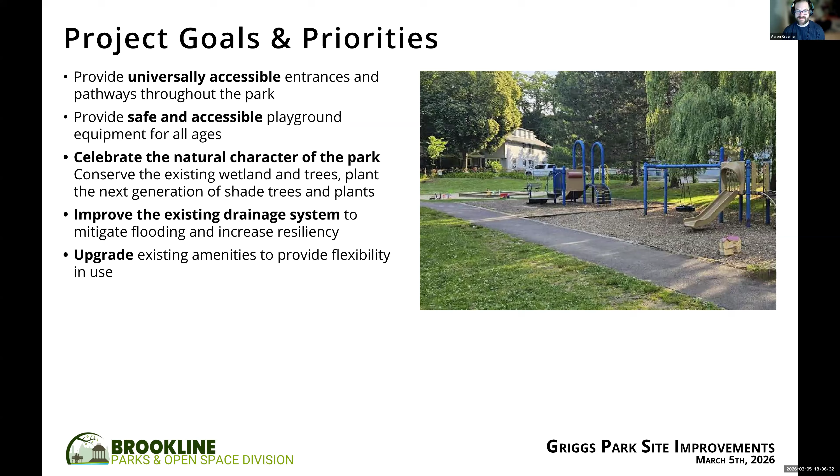These are just background goals and priorities. Our goals for this project were to provide universally accessible entrances and pathways throughout the park, provide safe and accessible playground equipment for all ages, celebrate the natural character of the park including conserving the existing wetland trees and planting the next generation of shade trees, and improve the existing drainage system to mitigate flooding and increase resiliency, and upgrade existing amenities to provide flexibility in use.

We are at meeting 6, March 5th. If design is approved tonight, we'd be looking to go to Park and Rec next week, Aaron. Next week. So if you approve it today, it will go to Park and Rec next week, which hopefully gets an approval there. And then we'll dive right into construction drawings, which will take the rest of the summer to produce. The idea is that we'd be bidding this either late this year or very early next year, for construction to start early spring next year as soon as the ground thaws.

These are some of the previous votes. In meeting 3, it was voted to have a 6-foot wide loop path while maintaining the existing wider path at the main entrance on Griggs Road. It was also voted to have no additional wetland interactions, no paths or anything through the wetland. The committee voted to see if we could keep the secondary entrance at Griggs Road the same. In meeting 4, the committee voted on Kompan to be the play equipment vendor, voted for 2 additional picnic tables for a total of 3, voted to keep the playground layout similar to existing with an added buffer between the path and the play equipment, and voted to have no adult fitness activities such as basketball or outdoor athletic areas added to the park.

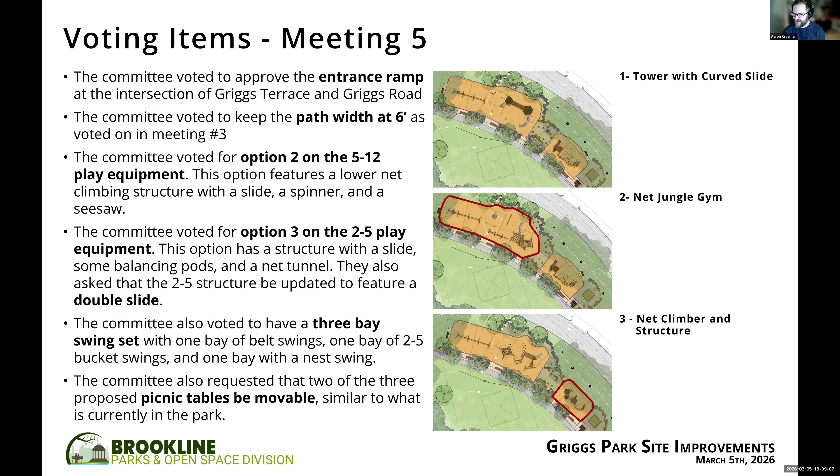I'm just going to go through this. If anybody wants it, we can come back to it.

Okay, final concept plan. First we're going to talk about pathways, then spend most of the time on play equipment, then natural landscape and drainage.

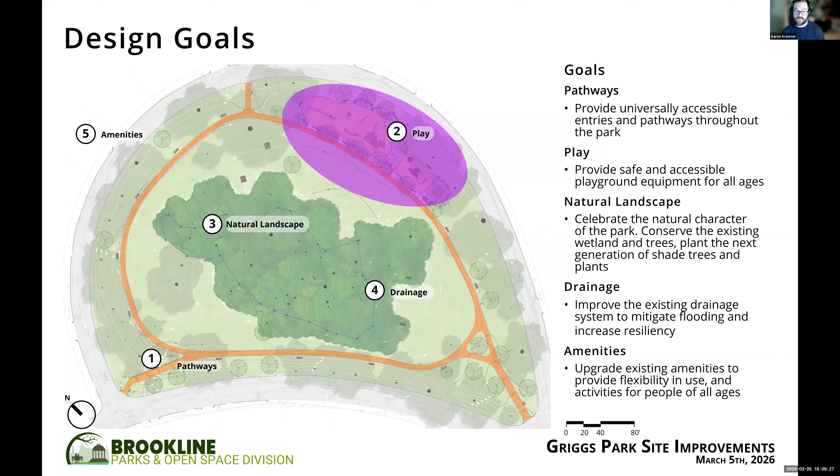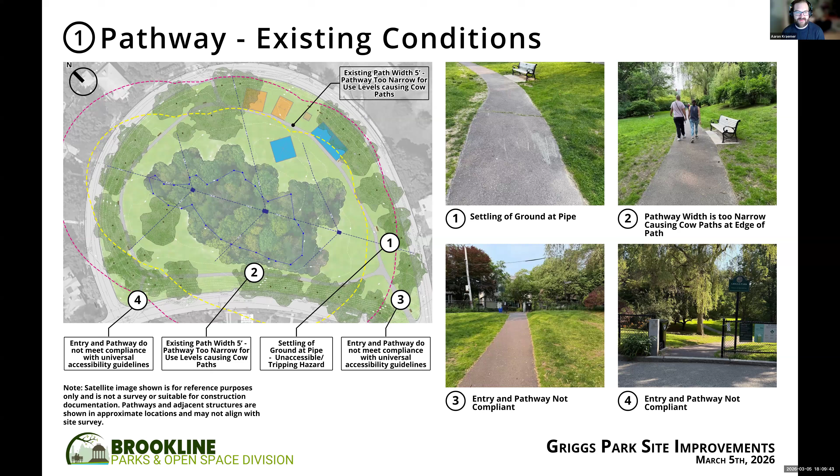Pathway goals were to provide universal accessibility. This is the current conditions - 2 of the entrances are not accessible, and there's some settling, especially at that drainage pipe. This is the same ramp as last time that was voted and approved.

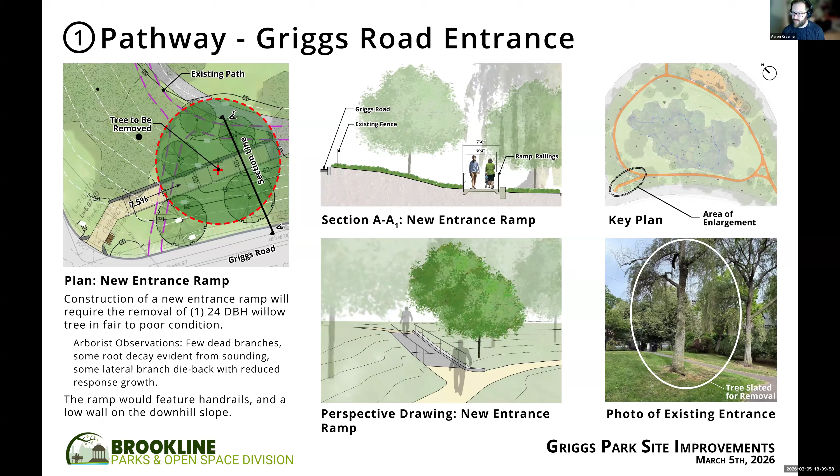So the one tree, a 24 DBH willow in fair to poor condition, we're going to have removed to construct a new ramp that will be 7 feet wide, giving you 6'3" between the railings.

So here's an overview of the revised play equipment. From the last meeting, the net structure from concept 2 is maintained. It includes a taller slide and several overhead play elements. We did remove the 2 spinning overhead elements and replaced them with monkey bars.

The 5 to 12 area also includes an inclusive net spinner and a seesaw. And in the 2 to 5 area, we have a double-slided structure linked to a tunnel with some log steppers, and there's also an added playhouse.

The one thing I will report back on, since this was something looked at - comparing the existing and proposed footprints of play equipment for the safety surfacing based on the options chosen, we were able to get the footprint down from about 5,500 square feet last meeting to about 5,000 square feet, which is only 500 feet more than what's currently at the park.

So here's an overview of the play equipment. On the left is the 5 to 12 area showing that slide, the 3-bay swing set, and the net climbing structure with the spinner. On the right is the 2 to 5 area showing the playhouse and the smaller structure with the double slide, the balancing elements, and the net climber.

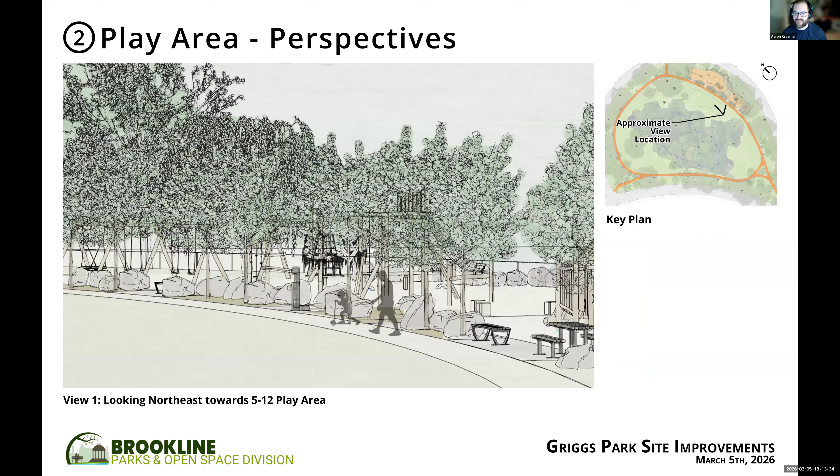And then kind of that natural area connecting the play areas. With that, I'm going to go back to the main slide and ask if anybody has any questions on the play equipment.

And if you have a preferred color for the swings. Aaron, will you just point out where the sandbox is, just so people are aware? Right by the 2 to 5 area, we are going to be putting the sandbox in. It's the same size as the existing sandbox. We'll do some boulders and logs around it. We'll also use the stabilized stone dust surfacing around it because that is an accessible surface and it's okay if sand gets tracked into that. Like now how it's hard to get lawn to grow there, we won't have the issue with the lawn in the mud.

Any other questions? There's a hand raised by Michelle Rosen. Do you want to take from the committee and the general audience, or Aaron and Millie, what do you think? Looks like Carol also has her hand raised first. So Carol, you want to go ahead?

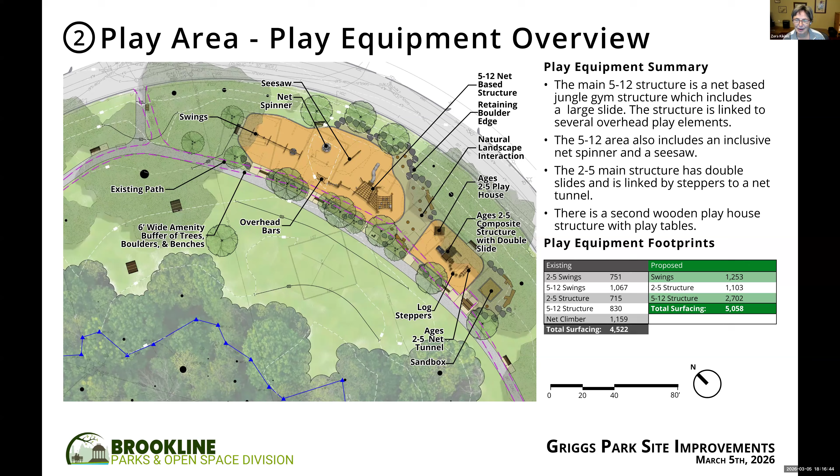Thanks. Zora has her hand up. You're muted, Zora. Thank you. So I do like it very much. Thank you for designing this so nicely for us. I liked it very much in the playground for the ages 2 to 5. You have two houses. One of the houses has kind of a nice roof, a bent roof. I don't know how I should describe it — a curved roof, yes, thank you. I really like that very much. I was actually wondering if the other house could have something similar, maybe a similar curve, symmetrical to this one.

That would be something I would have to ask the manufacturer. So that would be something I can't give you a definitive answer right now, but I could definitely, if you would like me to look, reach out to the company and see if they can mimic the two. So I like it very much, the curved one. It's really cute. Any other comments, Zora? Is that good? That's it. Okay, thanks. Stephanie has her hand up.

Thanks, yeah, I think this looks really great. And I just wanted to say thank you for the path. I know you mentioned last time that it might have to kink due to locating the swings where they are, so I was really happy to see that you're able to figure out not to kink the path. So appreciate that. I don't really have any further comments.

Oh, actually, I did want to ask about the slide — I know Aaron had kind of asked if that was possible to be a tunnel slide. I completely forgot. Oh, no worries, I can ask them. Same with the little roof. I can see if they can do a tunnel slide. If a tunnel slide's preferred, I can easily say yes, do the tunnel slide, or if not, would it be okay if it stayed like this? Oh, yes, yeah.

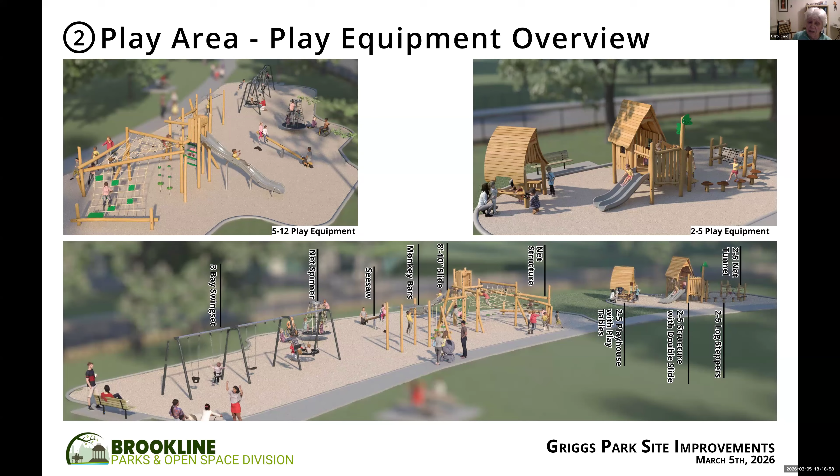Thanks, Stephanie. Carol, you have your hand raised again? Yes, I wanted to go back to the slide that Aaron had about the color of the swing equipment. Is that something we have to decide? I mean, we haven't voted on that, so are we going to be voting on that this evening? Yeah, or just any feedback. But yeah, ideally I would love to have a color to come back with them.

It seems to me it would be nice to have the brown because it would match the wood. Carol, I think that's — if you want to propose that, we can take a vote on it, just keep in mind the top beam will always be silver, unpainted metal. But there's no reason why we can't have brown uprights. So Carol, is that what you're proposing, brown uprights and keep the silver beam, which is fine? Sure.

So, if this is about the color, Stephanie, do you want to comment on the color? I see your hand raised. I can't tell if it's a new hand. I do want to comment on the color. Aaron, do you mind going? Oh, there it is, yeah.

I think I would prefer something like the dark gray, or even the anthracite gray, just because I know that generally, even if a color matches, it kind of stands out, and grays tend to fade into the background. So that would be my preference, to go with the grays.

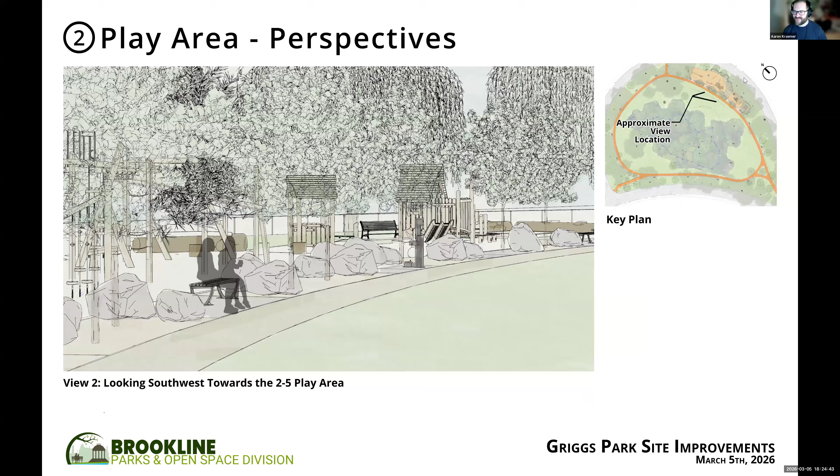Okay, now I'm going to move on to surfacing, which leads right into what we were discussing. Millie, do you want to take this one?

All playground safety surfacing must comply with several standards, including different ASTM standards and specifically the Mass Architectural Access Board standards for accessibility, because we really want this to be an inclusive playground where everyone can access the play equipment throughout different areas. Mobility is super important, and whether or not you're in a wheelchair, if you have a stroller it becomes an important issue to think about as families traverse through different areas of the playground.

It is town policy to use rubber surfacing in all of our new playgrounds, because rubber safety surfacing is the surfacing that is compliant and meets all of these safety standards, and is also slip resistant, firm and stable, with lower maintenance needs.

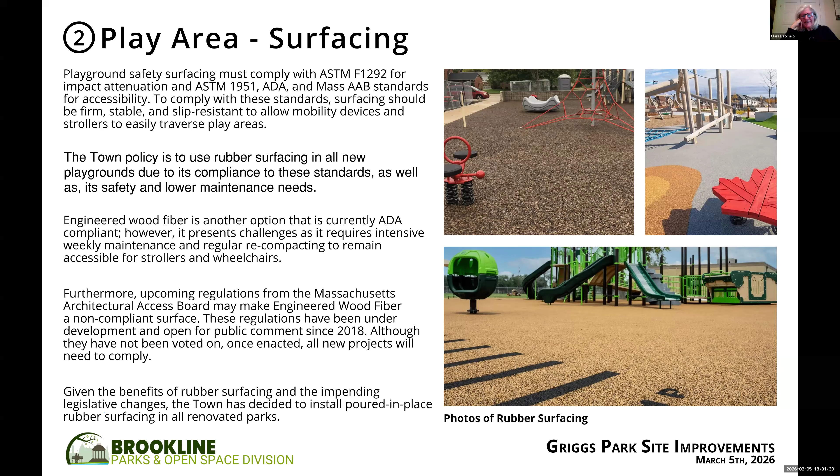Okay, now we should vote. So just to summarize, Aaron, right now you're going to try to get something close to the bottom photo, but you'll look at different samples and can even send them to committee members who are interested in expressing their opinion. That probably won't be until a year from now — people will wonder what this random email is. But okay, let's go back to the vote on the color of the swing.

There we go. So I think I've heard two people voice support for the anthracite gray, the darker gray, and I think Carol had said brown, but learned that the crossbar could not be colored.

Carol, did you go to... after looking at the ground cover, I don't need it to be brown, which is what I had said earlier. I think it probably would not be a good match, and it wouldn't be good to have this brown and a slightly different brown as the ground cover — they'd stand out less in one of the other colors, either dark gray or anthracite gray.

Okay, so I've heard two for anthracite gray and Carol says anthracite or dark gray, and I like the anthracite gray too. So let's hear from the rest of the committee if anyone has another suggestion — I'll call on people.

Oh, Zora has her hand up. Go ahead, Zora. I would go for the anthracite gray too. The anthracite gray, is that what I heard? Yeah.

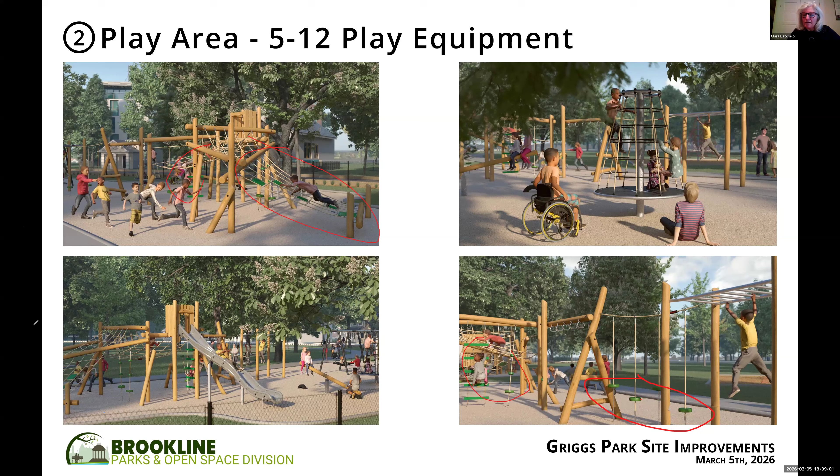Okay, so this is just a rehash of the last time. For reference, we are removing. Oh, Aaron, I hate to do this to you, but if you go back to the 2 to 5, are those going to be gray slides or are those our only choices? I believe gray. Kompan, I'm pretty sure, has gray, yellow, and green. I think gray is the most neutral color.

Okay, so right now the way you're presenting, gray is the slide color. Anybody have any comments? Stephanie, you have your hand raised. I like the gray. Okay, that's great, I see no other comments from the committee.

Naomi has her hand raised. You're muted, Naomi, if you're talking. You should be able to unmute yourself. She did. Thank you, I'm Naomi Schweitzer, neighbor.

I'm just wondering, what item are you discussing the color of now? The slides, if you see the bottom left picture on the screen. Oops, no, sorry, I was trying to circle it and instead my computer advanced. Okay, the bottom left picture on the screen has a double slide with a child coming down it, it's that slide's color we're discussing.

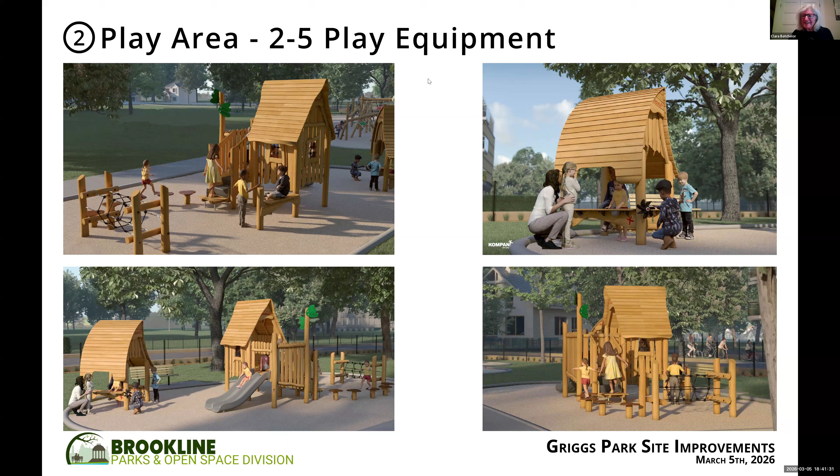Okay, now Aaron, I thank you, I just wanted to make sure we covered all color choices. Thank you.

Okay, back to it. Now we're going to the plants.

We are removing 120 caliper inches of trees, of which 6 are exempt from the tree preservation bylaw because they are either in poor or dead condition and have been assessed by arborists. One of them would require mitigation of 24 inches, and we are planting 108 caliper inches of trees. So we are good from a tree preservation bylaw sense in the amount of trees we are replanting.

These are the tree species we're proposing. I know people asked about this last time. As you can see, the weeping willow, by popular request, will be one of the approved plants we look at putting in, mostly on the exterior of the perimeter path. If I go back to the last image, some of these, especially along Griggs Road, up by the secondary entrance, maybe a couple by the main entrance, and those two on the upper left, could easily be weeping willow trees to keep that current condition of the willows around the perimeter.

Other than those, all the other ones are native, and a lot of them really like wet environments. These are the taller shade trees, especially the oaks, and the red maple is also a nice shade tree. So we'll put some of those over by the playground to really give that shade canopy.

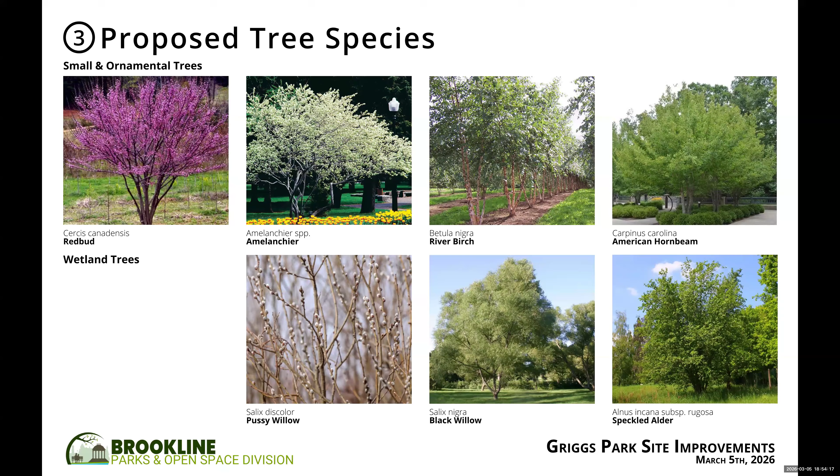Thank you. I just wanted to say that those of us who live directly across from the willow trees sometimes end up moving our cars farther into our driveways or away from under the trees, because I've witnessed very large boughs, more than once, falling off the trees. And I am one of those houses.

So I want to put in a strong request that if we're going to get 7 more willows, and we have these massive willows already, that the arborists continue to check them regularly, because they're beautiful but also tend to hold water and sometimes lose boughs. That's my request, that we keep that as a significant consideration, because we've seen it happen more than once. When it's very windy, I lie in bed worrying that the gigantic tree across the park from me may end up on my roof. So just that being a consideration, that we maintain them closely, especially if we're getting more. Thanks.

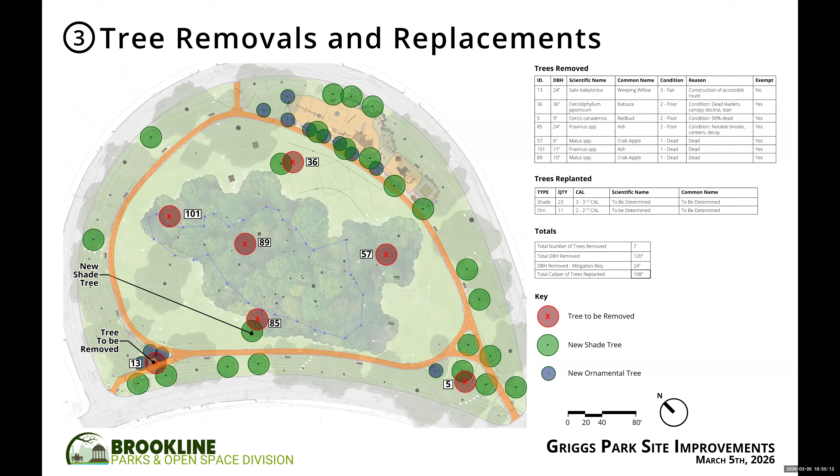Yeah, Jack and Pete are aware of the willows here and are definitely watching them.

This was from our wetland consultant, where we're going to be removing a lot of the invasives in the wetland. These were some of the shrubs and flowering plants suggested. Not shown on the slide are also some sedges, which look more like grasses but are also native wetland plants. So this is just a palette of some of the plants we could plant there, like sweet pepper bush—both sweet gale and sweet pepper bush have very nice smells.

Any comments on those? Some of those are perennials, right, Aaron? Some are perennials, some are shrubs. I think we'd lean more toward shrubs, but for variety and diversity we'd add in probably some plugs. So you'd have a bigger list—some of the shrub dogwoods will take wet, right? Yeah, this is just a small sampling of the list; otherwise I could show you a list of like 20 plants. But some of these are highlights, like the nice flowering ones—sweet pepper bush has both a nice flower and a nice scent.

Okay, we have 2 more hands up again. So I'll go with Zora first and then Carol. I didn't see who raised it first, but go ahead, Zora.

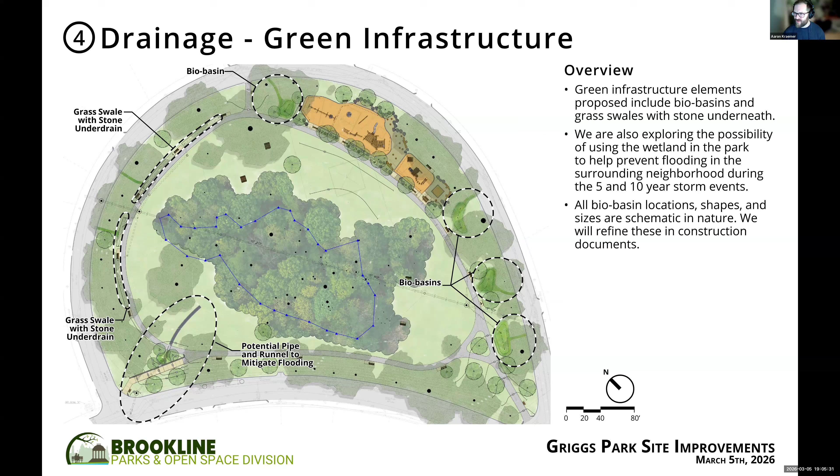So here's kind of a biobasin, as Sandy explained. There are small depressions in the landscape, and I have a couple precedent images on the next page, that take stormwater runoff. They filter it through both soil and stone, and then either infiltrate it into the ground — which Griggs doesn't have a lot of room to do — or it would basically filter it and go back into the storm sewer system. So we're diverting it from the catch basin, treating it a little bit using soil, plants, stone, and natural bacteria in the soil, and then putting it back into the storm sewer system.

And then the other one, so I think I saw Maria here. Maria, do you want to take this one? Well, it's your slide. Yeah, it's up to you. Sure, so one of the things we talked to engineering about, was that about a month ago? If you want, I can queue up why we're doing it, and then you can take the slide. There we go.

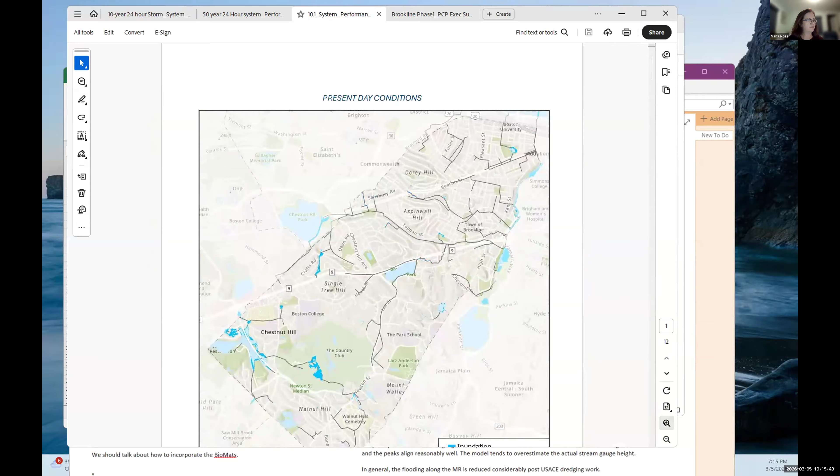Yes. Okay, so I'm going to switch over to present day conditions for a 2-year storm. We do not have any flooding in Griggs Park, which is here. I'll zoom in. So 2-year storm, we're good. Then we get to...

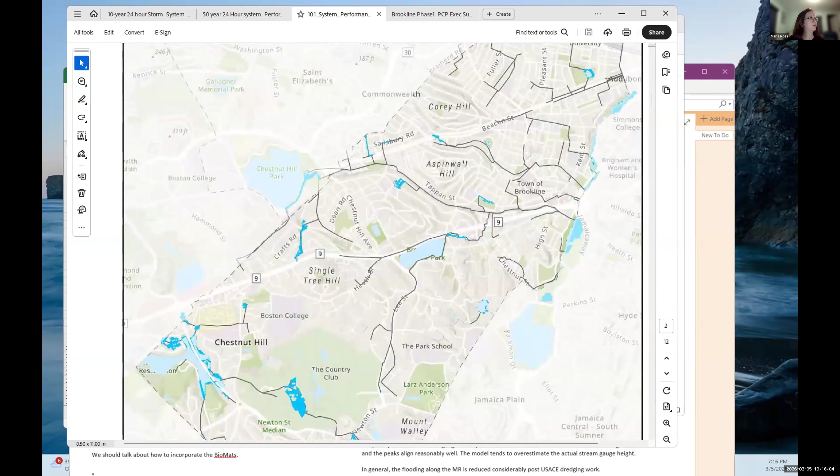5-year, and we do have some flooding in the 5-year. Let me scroll down. Actually, 10-year. I don't know if I have the 5-year. Oh, we do have 5-year. Okay, so during a 5-year storm, I don't know the inches off the top of my head. 2-year is 3.25 inches, and a 10-year is 5.13 inches of rainfall runoff.

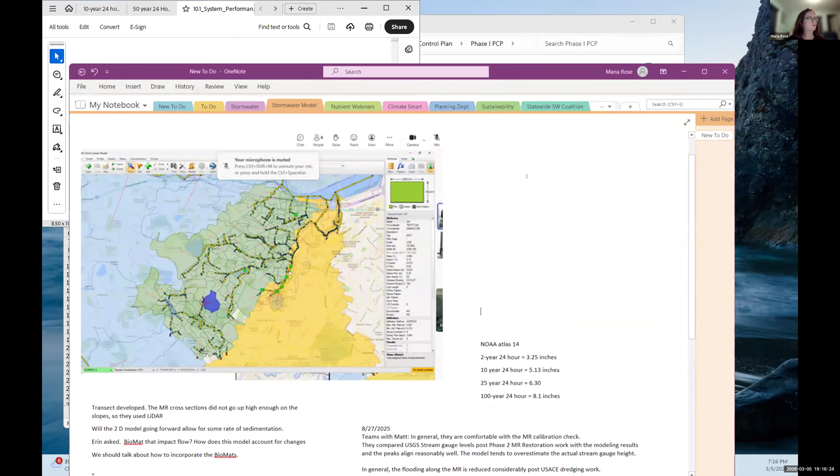Let me go back to this. Oops. Give me a second to make that bigger.

So in a 2-year storm, only the park is seeing some flooding, but by the time we get to, I'm sorry, that's 5 years. By the time we get to a 10-year storm, that's when we see our pipe capacity reaching its max. So everything that's in blue are flood inundation areas. We have a bit of a problem that's backing up all the way at Beacon Street due to capacity constraints, and these gray lines are the pipe.

Actually, let me back up a little bit. So you can see all the streets are white. All the dark gray lines here are all our pipes that were modeled. We modeled drain pipes that are 24 inches in diameter and larger. So this one's a 48-inch drain culvert called Tannery Brook, and we have surcharging everywhere there's blue.

So by the time we get to a 10-year storm, we're having surcharging on Griggs Road, and I can zoom in now, but we have surcharging there as well as it backs up the line. Surcharging just means the capacity at the pipe is at complete capacity, and it's coming up out of the ground, out of the catch basins, the storm drains in the street. It can be due to a steep slope, or it can be due to just not having finite capacity in the pipe. So this happens in an urban system.

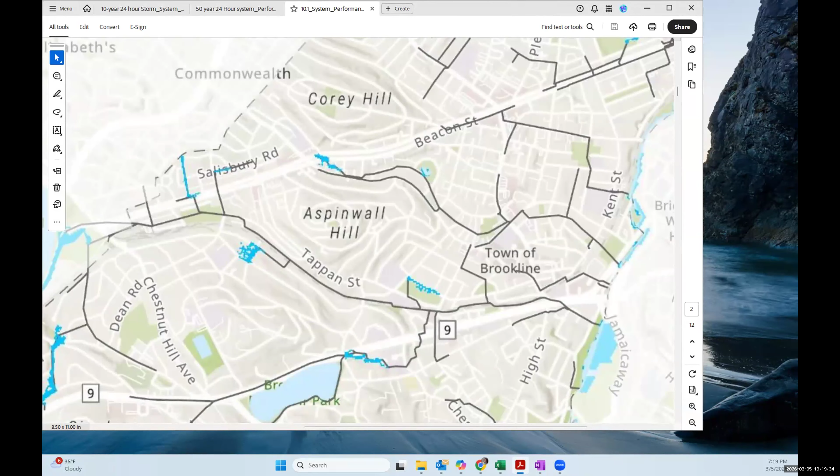The second part is: is there sufficient area there to actually have a positive impact on the upper areas of the drainage system? From my perspective, I'm just looking at the park. I get information from Maria with the numbers, and we model the park itself. We come up with potential scenarios, like this would happen in this storm. Then we give it back so they can analyze the entire system and say, this will help by this much.

So it's not an absolute that that's something we would do. It's the question of, is there an opportunity here? And if there is, and it doesn't adversely impact the actual park, it might be a very good option for Brookline and for Maria and her group. That's a little different way I'm approaching it, because I work for Aaron and he tells me what I have to do, as opposed to trying to solve the drainage problems for Brookline directly.

Kudos to Sandy, because she gets this stuff all too well, and she's very accommodating with her time, and very respectful of all the many things we're trying to solve.

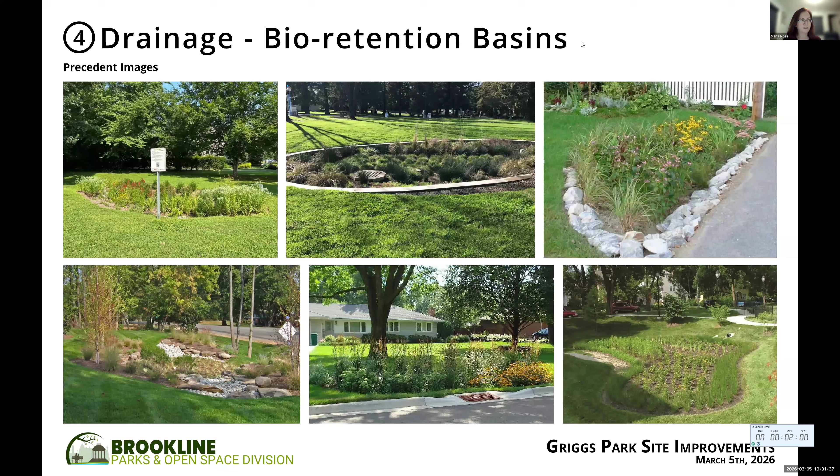Into the park. Well, the bioretention areas are taking Griggs Terrace, right? Yes, correct. I was trying to go back. And then what we were talking about, the option that we're evaluating, is that there's a 48-inch by 48-inch drainage culvert that runs along Griggs Road. At a certain elevation, when the water reaches that box culvert at a certain height, there would be a relief for the water to go into Griggs Park and allow some overflow. It would store there temporarily on the land surface and then flow back into that same culvert, just a few feet down. So that would be the system, but there are a lot of reasons for superficial flooding.

I will try to remember to come out there, or you can find my name on the webpage—if your street turns into a river, I'd love to get photos of it, because we're in the middle of doing a stormwater master plan and we're nearing the end of it. The models are only a prediction of what could happen, so there could be an error somewhere, or it could just be that the catch basin inlets are clogged, which is a very common reason we see surface flooding. Leaves, and even some of the trees you guys talk about—like those sweet gum pods—the leaves and litter very easily clog and overwhelm the inlets to the storm drains, and that's another reason there can be surface flooding.

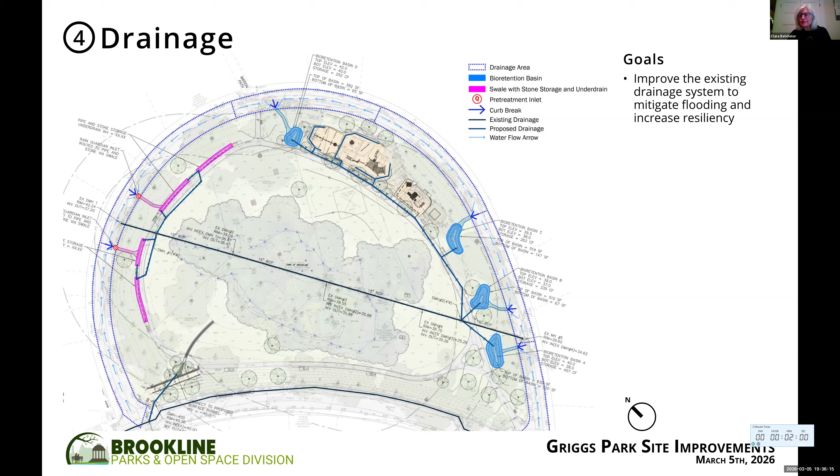Okay, thanks for all that information. And Aaron, we're going to go on to amenities now. I think we've covered drainage pretty much, so should we continue evaluating this option?

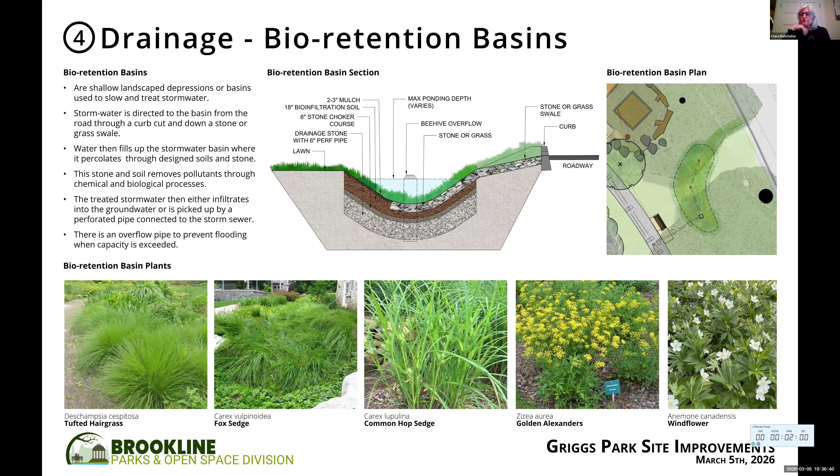That's what we really came for. So is everybody okay with us continuing to evaluate this, especially the stormwater overflow? Let's have a vote - you would like a vote on whether to continue looking at the stormwater mitigation as presented. Yes is to continue, no is we don't want any of this in the park.

Okay, I'm going to call committee people as I see them. First, Carol - yes or no? Yes. Jane, yes. Zora, yes. Teresa, yes. Stephanie, yes. And I vote yes. So that's unanimous - we would like you to continue with this.

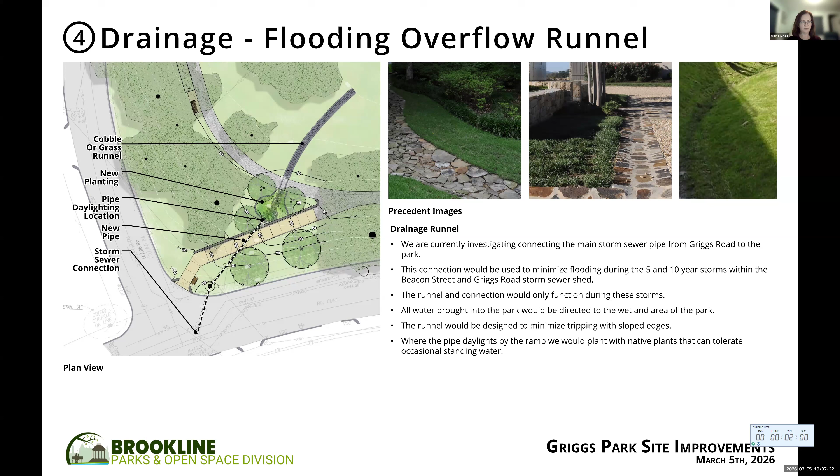I believe there's a waiting list for dedication benches here, so we may end up having them replaced with more dedication benches so people have the opportunity to add more dedication benches to the park.

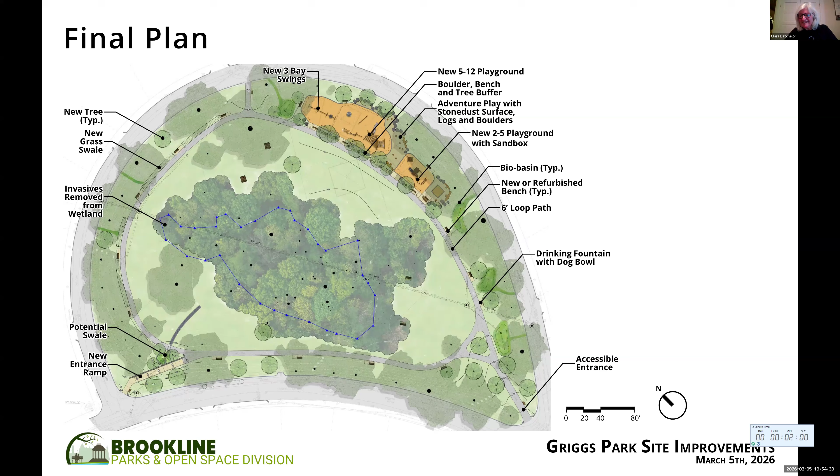Thank you, Clara. We're super excited that we're at this stage and excited to move this forward. As Clara mentioned, next week we're going to Park and Recreation Commission for the vote. Once we have that, Aaron will dive immediately with Sandy's team and our engineering team to produce the final construction documents, hoping to go to bid by the end of this year or early next year, so we can meet the construction start time for spring 2027.

Again, super excited, and I really want to thank Aaron for all the hard work he's done over the past several months, and also Sandy, our civil engineer from Nitsch, and Maria for working with us on the larger neighborhood and stormwater drainage. I especially want to give a huge shout out to Clara for chairing this DRC, and to our DRC members, Teresa, Carol, Jane, Patricia (who isn't here today), Stephanie, and Zora. You've all been amazing with thoughtful feedback, looking at every angle and ensuring everyone's voices are heard. So thank you so much, and thank you to everyone who joined today, all members of the public. This has been one of the most robust DRCs, showing Brookline at its best. Thank you so much, everyone.